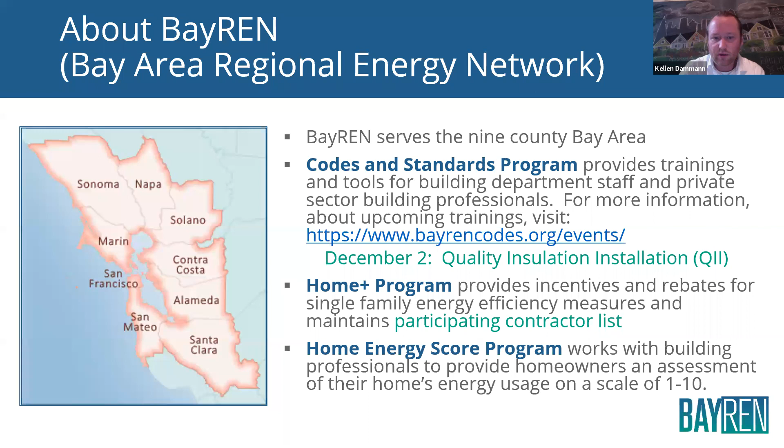Okay, so this is Home Plus. Like I said, it's a rebate program for homeowners. In order to offer rebates as a contractor, you need to sign up with the program, which involves sitting in on some webinars and filling out some paperwork. It's free for contractors to join, so you don't need to worry about paying any dues or anything like that.

And really, some of the other benefits include all the marketing that the counties are doing in the 9 Bay Area counties. So we're really trying to drive demand to BayREN contractors so they can do this work and offer rebates to their customers. There's another cool service called the Home Energy Advisors.

So people can call them up. They're part of the BayREN program, and they're just there to kind of answer all their questions about home energy improvements, how to navigate the rebate programs. So if you don't have time or you want someone that you're working with to get a second opinion or talk to someone who's kind of a third party energy expert, that's a good service as well.

And can we advance one more? There we go. And then Home Energy Score. I wanted to shout this out too, just because I know that some contractors use this kind of as a referral service. Basically what it is, you go into a home and do a home energy score, which is kind of taking the specs of a home. It should last about an hour or two, depending on the size.

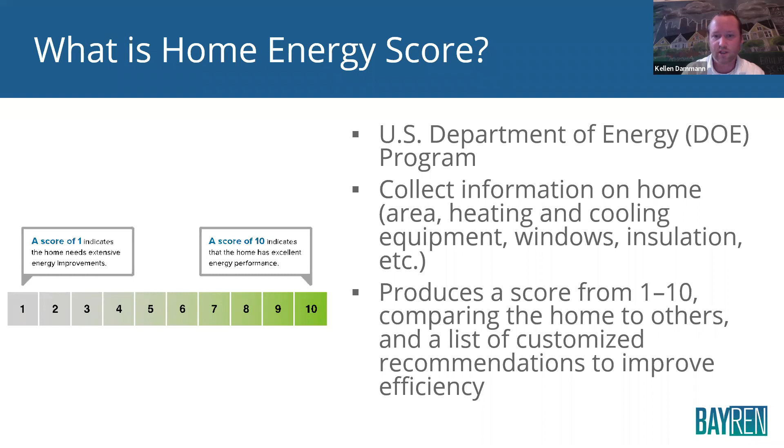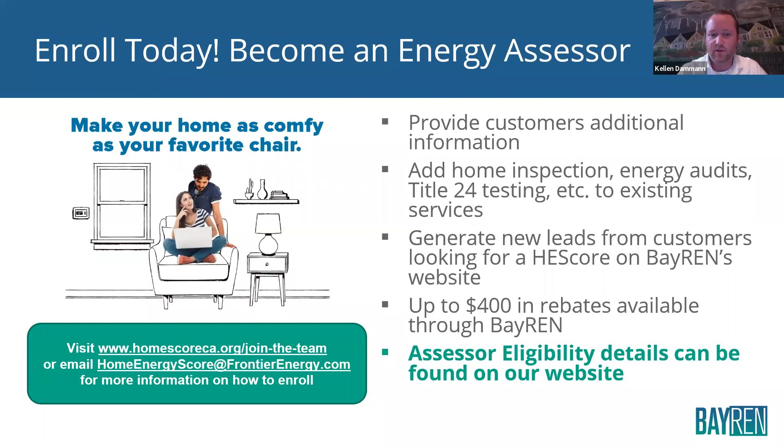And that's just more on Home Energy Score. Looks like it's up to $400 in rebates. But yeah, 200 for sure. I think there's a couple add-on programs to get it up to 400. And yeah, that's it for BayREN, I think. There we go. Great. Awesome. Thanks, Kellen. All right, so today's learning objectives as far as the heat pump water heater class goes.

So we're going to learn some step-by-step actions needed to replace a gas water heater with a heat pump water heater. We're going to kind of go through an example of the steps involved in that process. It's definitely different than just a like-for-like swap out of a water heater. We're going to be familiar with the benefits of electric heat pump water heaters.

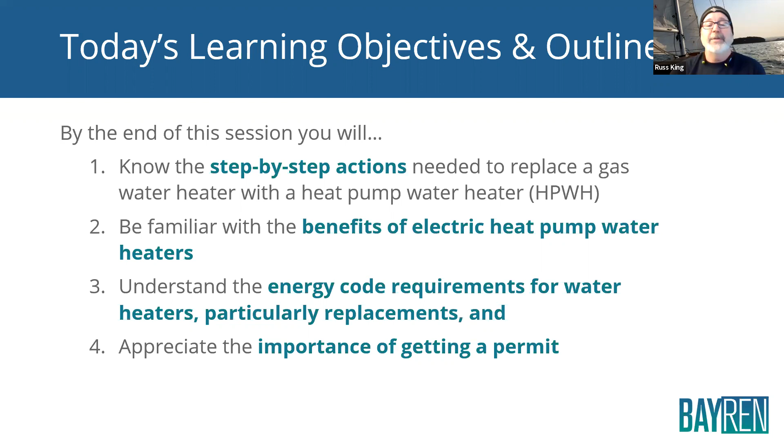We're going to understand the energy code requirements for water heaters in general, particularly replacements, because that's going to be the most common type of water heater project that you'll be dealing with, just replacing an existing water heater with a different type of water heater. And then we're going to learn to appreciate the importance of getting a permit for replacing water heaters.

Today's agenda: heat pump water heaters. I'm going to minimize that screen there. So we'll talk about some of the specifics related to heat pump water heaters. We'll talk about the 2019 Energy Code requirements. If you're not familiar with the California Energy Code, it changes every 3 years. It's called Title 24. It's actually Title 24 Part 6 is the correct term. We are in the current cycle, which is the 2019 Energy Code requirements. It took effect on January 1st of this year.

And then we're going to talk about some step-by-step installation details. We'll talk about best practices. We'll have a real quick quiz, and then we'll give you some more resources and have a Q&A session at the very end. We're scheduled to go until about 4:15, if I'm not mistaken. And this is the first time we've taught this particular version of the class. So I'm going to go a little quick just to make sure that we don't run out of time at the very end. And we'll stop and have a place for you to ask questions.

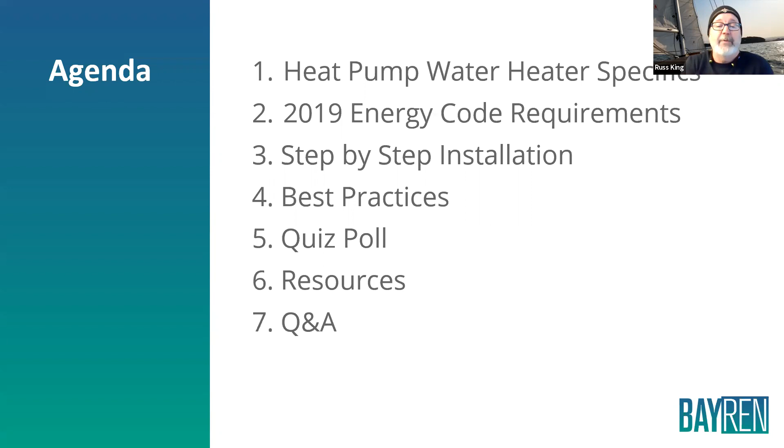All right, so you should have been mailed some handouts. If not, let us know. We can send you a link to those. Those include a heat pump water heater assessment sheet, a residential water heater alterations permit guide, and then a regional heat pump water heater incentive guide for contractors. Okay, so you should get all that information. And then you'll get copies of these slides after the training, okay?

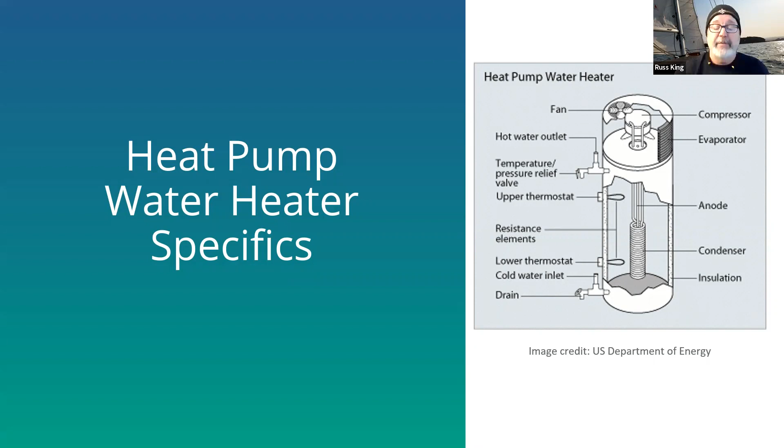All right, so let's talk about heat pump water heaters. As you probably know, they've been around for a long time. I didn't realize this. They've been around since the 70s. They just didn't get any traction for a variety of reasons, but they're definitely making a comeback right now for a lot of reasons. In the current market, basically all the major manufacturers do manufacture some sort of heat pump water heater. There are a few companies that kind of specialize in heat pump water heaters, like Sanden. Their heat pump water heaters are pretty unique, very efficient.

As far as the size goes, they're very similar to a regular storage water heater, 40 to 80 gallons. As far as electricity, they draw about 1,300 watts. Okay, when they're running, they use about the same electricity as a blow dryer. An electric resistance element, when that kicks on, will typically draw quite a bit more than that. So when they are running, they draw a lot less electricity in heat pump mode. Most of them have electric resistance backups, and when that kicks on, it'll pull 4,000 to 5,000 watts.

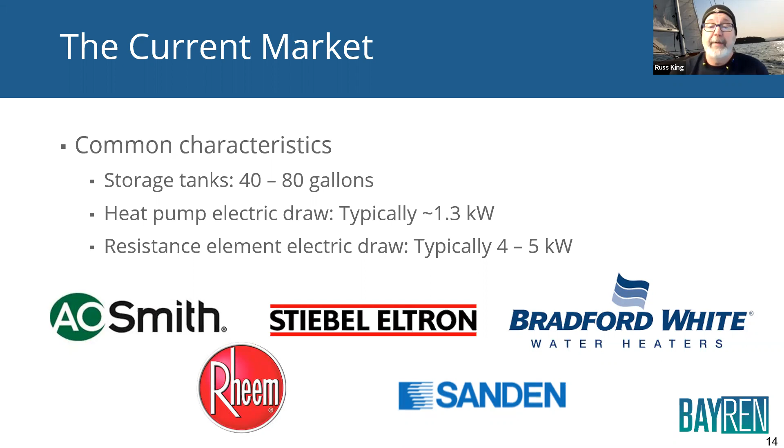Okay. There are two basic styles, if you will, of heat pump water heaters. There's the integrated, where the heat pump and the tank are all kind of one piece. And then there's the split system, where the storage tank sits in one location, and the condenser and the heat pump unit are separate and kind of sit outside or wherever you want them to go. We'll talk a little bit about where you can install these.

Where you can install heat pump water heaters is a consideration, because in order for them to work, they need a good flow of air. That's where they get their heat. They extract heat from the air. And so in order to do that, they need a good flow, a good supply of air to pass around them so that they can extract that heat.

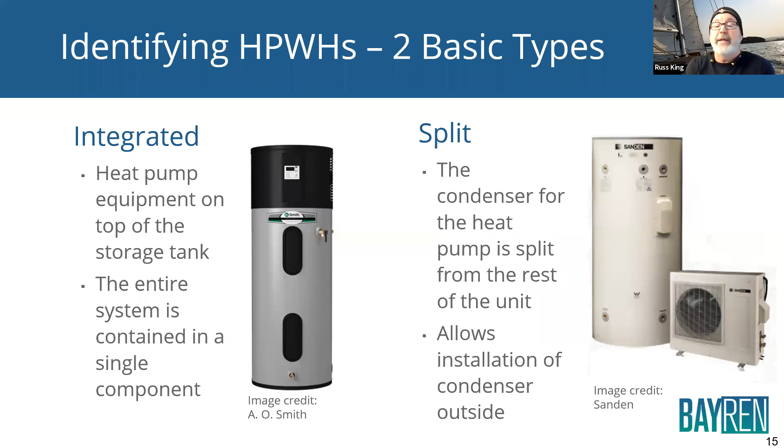So on an integrated heat pump water heater, just some features. There's going to be the heat pump unit that sits up on the top there. You can usually tell those by the little louvered vents that allow air to pass through. You'll see those on the right-hand side of this particular one. You see those louvers up there. There'll be some sort of control panel, a little digital control panel, as opposed to the older style water heaters, like a gas water heater that's just got a knob with a dial on it. These are pretty sophisticated. There's definitely a geek factor that goes along with heat pump water heaters.

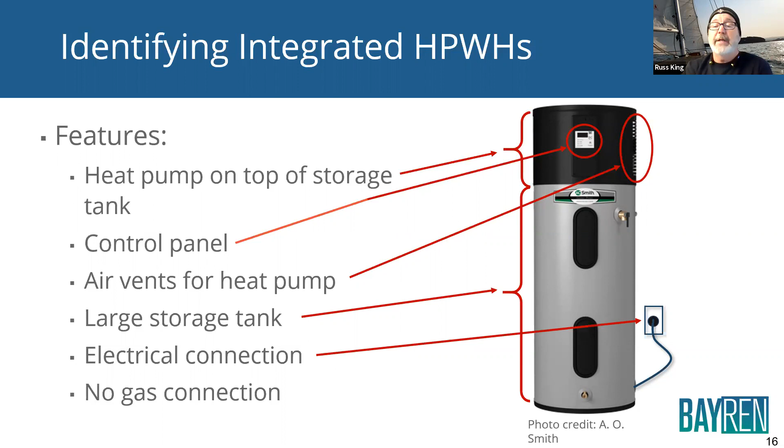As I mentioned, there'll be those little air vents on the side so that air can pass through. They don't always have to be on the side. They can be on the side and the top or some combination. But the point is air has to pass through there. That's where they're getting their heat; they're actually extracting heat from the air that circulates around it. There will be some sort of large storage tank. There will be an electrical connection and no gas connection, okay? So those are kind of the features of an integrated heat pump water heater.

Now, as far as the split system, the split heat pump water heaters, the heat pump is separate. It's a separate unit. If you're familiar with a ductless mini split, like a Fujitsu or a Mitsubishi mini split, it looks just like that. It's a little suitcase style condenser with a fan in it, and just like a mini split heat pump that does space heating, it's extracting heat from the air. Okay, now the nice thing about these is that you can basically put the tank anywhere you want to, but there will be a refrigerant line.

If you look up in the right hand corner here, you'll see the outdoor unit and the tank. There will be refrigerant lines, just like a mini split heat pump for space heating, connecting those two units. Okay. So no heat pump on the top. There is a condenser, a separate component, and then there will be refrigerant lines passing through from one to the other. Okay, so that's how you identify a split system.

These can sometimes be confused. There are certain types of solar water heating systems out there that have just a plain storage tank that looks kind of like this, but really the identifying feature on these is the refrigerant lines coming out of them. Okay, there will be insulated copper lines coming out of them.

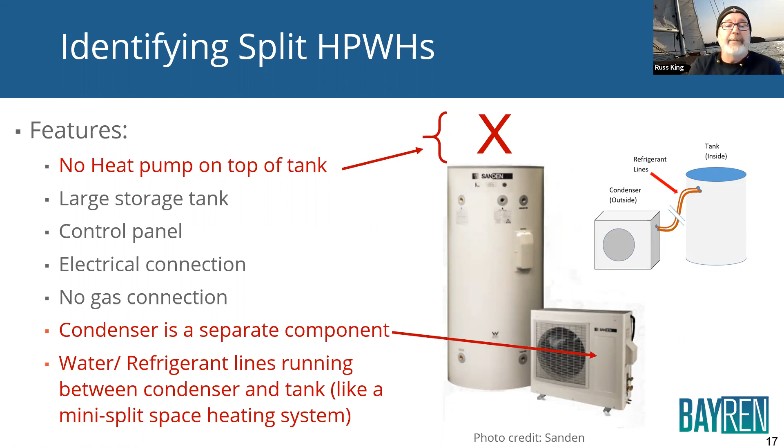Quick note regarding efficiency ratings. For many, many, many years, we used something called the energy factor, the EF. Well, the Department of Energy is switching over to a new type of rating called the UEF. And it's basically just a slightly different way of testing water heaters to get an efficiency. It's different than the energy factor.

A single water heater could have both a UEF and an EF. They will be different numbers. They believe that the UEF is a little bit more realistic and it does a better job modeling efficiency of a water heater when it's under actual real use. Okay. If all water heaters have UEFs, it allows you to compare similar water heaters to each other to say, oh, this one's that much more efficient than the other one.

It is replacing the old energy factor. They're trying to get rid of that. All water heaters manufactured after a certain date, which is June 2017, will have a UEF rating. Anything before that will have an energy factor.

Okay. There's no real one-to-one correlation between an energy factor and a UEF. Some are lower, some are higher. It just kind of depends on the features of the water heater and the type of the water heater. So it's not like you could just take the energy factor and multiply it times a factor to get the UEF. It's actually a different test methodology. And so it varies.

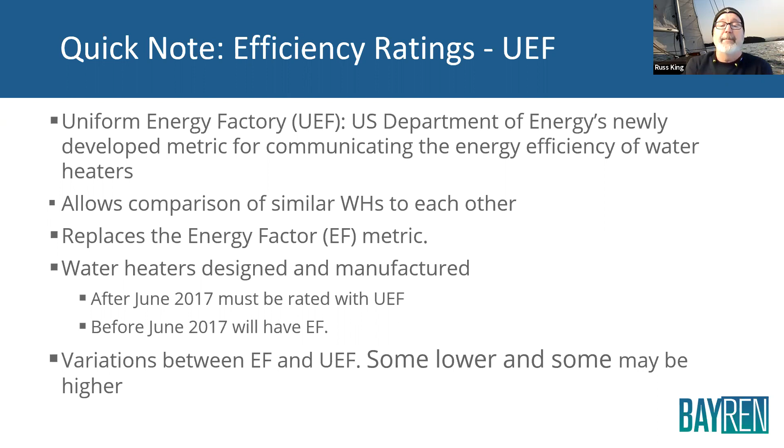NEEA is the Northwest Energy Efficiency Alliance. They are the people who have been delegated to develop water heater specifications for testing of heat pump water heaters. It's a collaboration of all the Pacific Northwest organizations and utilities and laboratories and stuff like that. And they fund energy research for developing new types of water heaters and advancing water heaters.

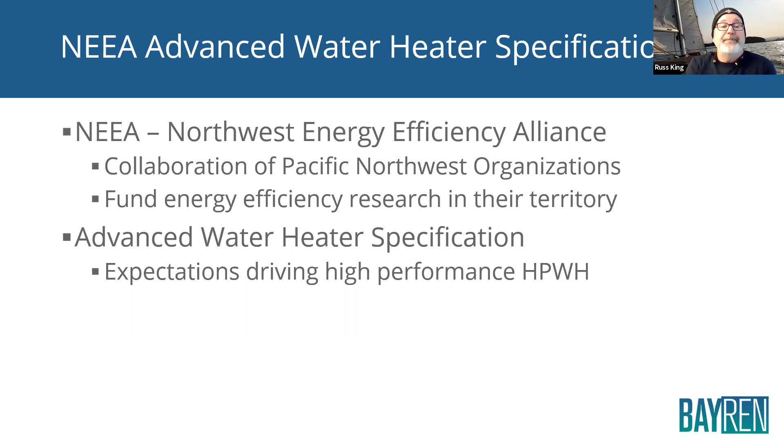But they're kind of like the AHRI. What AHRI is to air conditioners and furnaces, NEEA is to heat pump water heaters. Okay, they're the ones who test them. They develop the test protocols, and they're the ones who issue the efficiency ratings on various heat pump water heaters. So that's where you'll go to find something.

If you want to look up a heat pump water heater to find out what the efficiency is, you'll go to the NEEA qualified products list, and they have 3 basic tiers for the different levels of efficiency for heat pump water heaters. And it's not just efficiency. If you look down here, you'll see tier 1, tier 2, and tier 3. They do have certain efficiencies. So tier 1 is a 2, tier 2 is a 2.3, and tier 3 you have to be at least 2.6. But there's also other features that they have to have in order to hit those tiers as well.

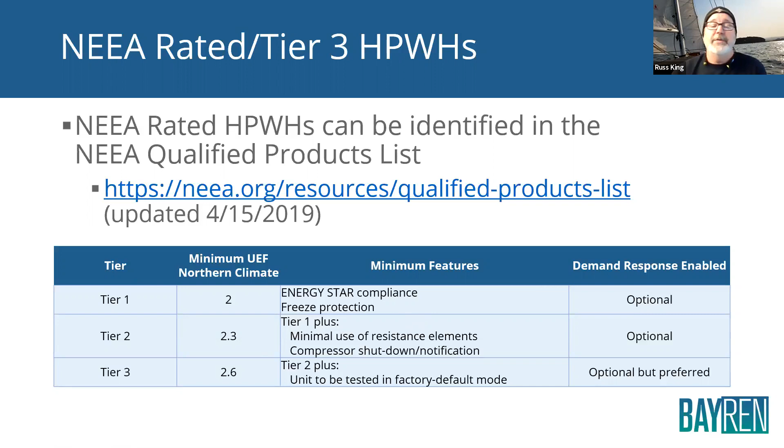Okay, and that'll come up in a little while because one of the requirements will say if you're going to replace this kind of water heater, you have to either do it with a tier 3 with all these features or a tier 1 and you don't have all those extra features. So that's why these tiers are important here.

So some of the advantages of heat pump water heaters: first of all, they're very efficient. If you compare them to other types of water heaters, using the new UEF, gas storage water heaters are in the 0.59 to 0.69 rating. That's an efficiency rating, so 59 to 69% efficient. Gas tankless water heaters, instantaneous water heaters, are 82 to 95% efficient.

Electric resistance water heaters are 99% efficient. That's very efficient, but the problem is they're using electricity, and electricity is very expensive when you look at it on a BTU per BTU basis. Then you get to heat pump storage water heaters, and you're getting efficiencies of 200 to 340%. How is that possible? How can you be more than 100% efficient? Well, heat pump water heaters cheat, if you will. They cheat a little bit.

They're not actually making their own BTUs. So whereas an electric resistance water heater takes electricity and converts that electricity into heat, heat pump water heaters steal BTUs from the air. So the electricity that they do use is not converting to heat. It's taking heat from the air by compressing and expanding refrigerant. So it's actually a much more efficient way to gather heat as opposed to creating heat from scratch.

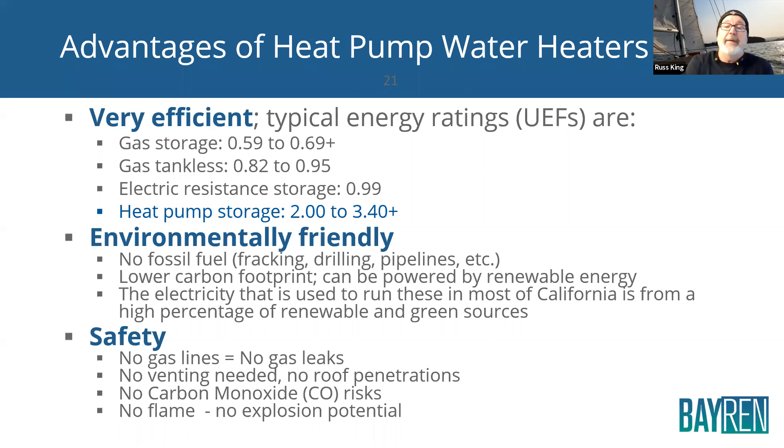There's no gas. There's no gas leaks for explosion. You don't have to worry about venting, so there's no penetration through the roof for leaks and things like that. No carbon monoxide. And then no flame, no explosion risk potential for storing gasoline next to it in your garage or things like that. Okay.

Some other advantages: they're Wi-Fi connected. If you've ever had the opportunity to play around with a Nest thermostat or anything like that, where you can call it up on your smartphone and change the temperature in your house. A lot of these heat pump water heaters are Wi-Fi connected, so you can actually call them up on an app on your phone and set the temperature. You can see how much it's been running and things like that. So very precise temperature control.

And by the way, the whole geek factor with the Bay Area, the very tech savvy region that we live in, this is actually a big selling point for people to be able to call up their water heater on their phone.

And then the other interesting thing is, with heat pump water heaters, a byproduct is cool air. Because they're extracting heat from the air around them, when you extract heat from something, you're essentially cooling it. So when you extract heat from air, the air gets cold. And so what comes in is warm air, what comes out the other side is cold air.

So if you can take advantage of that and use that cold air to maybe cool your garage on a hot day or a sunroom or something like that, by all means, take advantage of it. A lot of the Bay Area tends to be fairly cool, so maybe that's not the best thing, but certainly in the warmer climate zones, it's a good thing.

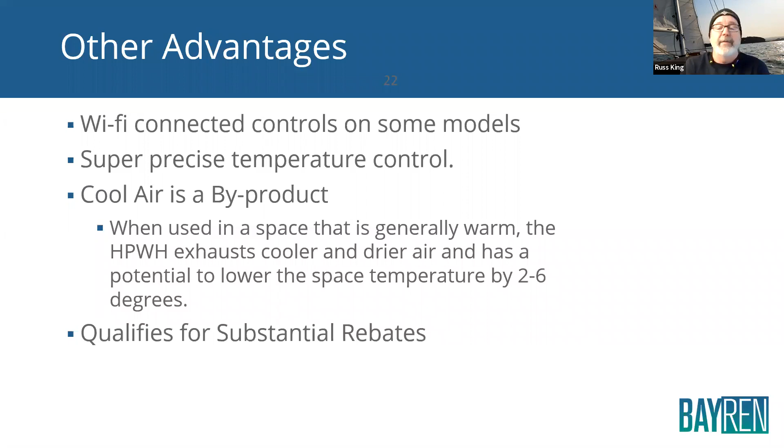And then, of course, heat pump water heater rebates. A lot of these BayREN programs and things like that are really, really encouraging people and basically, in some cases, buying the water heater for you to put in, okay? So that's great. Take advantage of those for sure.

So some of the installation requirements and considerations: most require 240 volt, 30 amp supply, okay? Some of the newer ones are getting down into 15 amp circuits, and then hopefully pretty soon, or supposedly coming soon, they're gonna start having some 115 volts, so we don't have to worry about taking up so much room on the electrical panel.

Heat pump water heaters require a certain volume of air that they can extract heat from, or ventilation where air is passing through. As far as volume, this is not a code requirement. This is mostly what manufacturers suggest, that about 750 to 1,000 cubic feet is what they need to work well.

And that's actually less volume than, say, a one-car garage. So if you have a one-car garage, this will work fine. The other thing is if you can provide vents to let air pass through. So you can put these in a small room or a closet as long as there's good ventilation of air, that air can pass through and sort of refresh itself. You don't want to put these in a very confined space, because the air will get colder and colder and colder, and pretty soon the air is really cold and the water heater is really struggling to extract heat from that air, okay?

You do need a condensate drain. And then the other thing is, typically replacing a gas storage water heater with a heat pump water heater, you will usually put in a slightly larger storage, okay? If you're replacing a 30-gallon gas storage water heater, you might want to go to a 50-gallon heat pump. If you're replacing a 50-gallon gas, you might want to go to an 80-gallon or something like that. And the reason is they don't heat the water quite as fast.

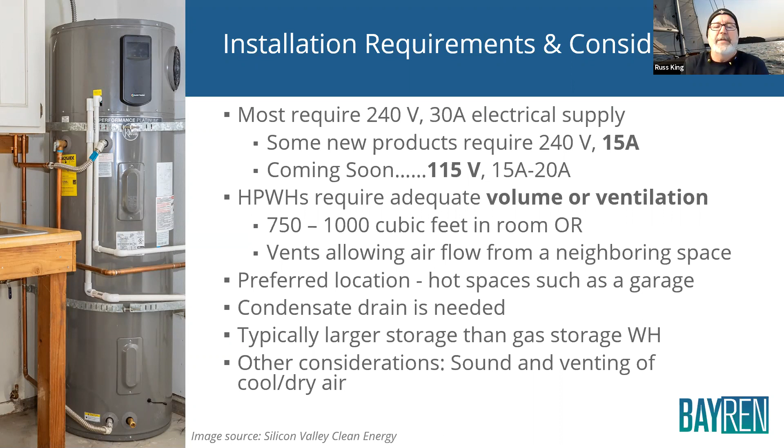Okay. All right. So let's talk about heat pump water heaters and the energy code. But before I do, are there any questions? Yeah, Russ, I was going to tell you we do have a question in the Q&A.

Okay. Let me see. How does this electrical equipment work during PSPS events? I presume you mean when they shut off power. Well, just like any other electrical equipment, they shut off the power, it shuts off. But the other nice thing is these work very well if you have like a house battery or a backup generator or anything like that. They will work like that. But yeah, like any other electrical, when they're shutting off the power for safety reasons or just general power outages, they do shut off. But they do typically have a much larger tank on them as well. So you'll have a much larger supply of water than you would if you had, say, a smaller electric resistance water heater or something like that.

As far as when and what companies will be offering the 115, I honestly don't know. I've just heard from several places that those are in the works. New companies are coming out almost weekly with new technology on this stuff. So I would just Google it and find out. Yep. All right. Did we get them all, Jeremy? It looks like there's one in the chat as well. Oh, in the chat. Let's see here.

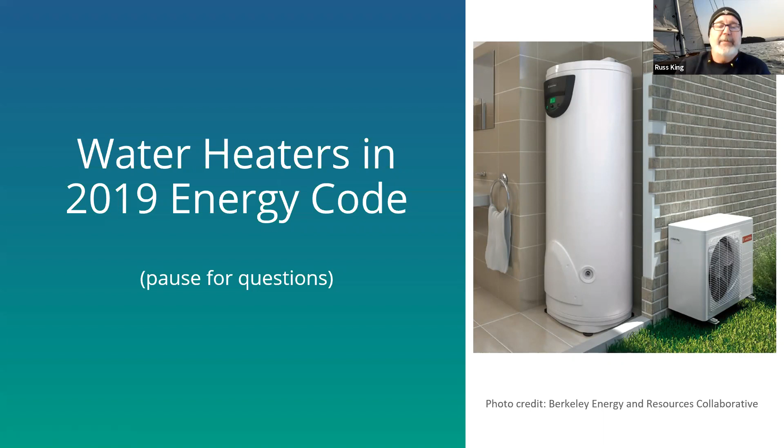Okay, let's press on. So energy code, 2019 energy code, as it relates to heat pump water heaters. The first thing you need to know about the energy code is that it breaks California up into 16 climate zones. And in the Bay Area, there are 5 of them, climate zones 1, 3, 2, and 4, and 12. 1 is the coolest one. You'll see that's up the northern coast there. Climate zone 3 is kind of the greater Bay Area, if you will. It's a very marine climate.

Climate zones 2 and 4 are sort of transitional. You definitely get some hot days in Santa Rosa. You get some hot days in San Jose and east of San Jose. And then climate zone 12 is actually where we are over in the Sacramento Valley. It's hot. It's cool winters and hot summers, okay? So you've got to know which climate zone you're in. It does vary, not so much for heat pump water heaters, but a lot of the other energy code aspects vary a lot by the climate zone that you're in.

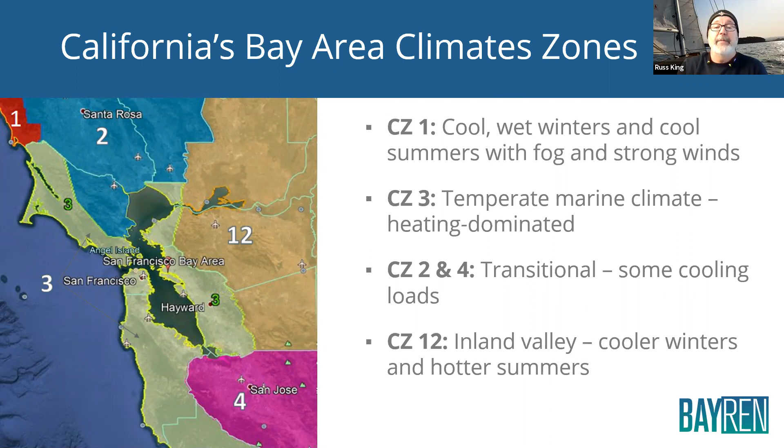Okay? Then as far as how the code applies to various things, the energy code sort of depends on the scope of project, okay? And when we're talking about projects that deal with residential water heaters, these are the basic types of projects that you're going to deal with. You're going to deal with a replacement. So that's an existing home that's got a water heater in it, and you're going to replace that old water heater with the new water heater. And when you do that, you can either do a like for like. So if you've got an electric resistance and you're replacing it with an electric resistance, you can do that. Or if you've got a gas storage and replacing it with a gas storage, you can do that.

The other thing you can do is you can replace a gas storage tank with a tankless water heater. That's one. And then you can switch fuels. You can go from gas to electric. So those are the basic types, and in the energy code, those are referred to as alterations, okay? And that's what we're going to focus on mostly today, because in terms of sheer volume, that's probably the most common type of water heater project. But there are some other ones too.

You can add a water heater to an existing home. So you've got one, and the people living in the house have decided that one is not adequate, and maybe they can't get heat way over on the far side of the house. So they're going to put a little tankless water heater over in the master suite or something like that. So that's adding a water heater. That's also called an alteration, but instead of replacing a water heater, you're increasing the number of water heaters. Let me put it that way.

The other thing that can happen is you're adding onto the house. You're adding a wing onto the house, or you're conditioning the garage or something like that. That could also involve adding a water heater. Whenever you make the house bigger, that's called an addition, and that has certain code requirements that go along with it. And then, of course, last but not least, new construction. You're building a brand new house from the ground up. It's going to have a water heater or 2 or 3 or 4 in it. And that's called new construction. That has its own set of rules that apply to water heaters. Okay. So knowing those different kinds of projects, that's how we're going to organize our discussion about the energy code. And then, of course, we're going to focus mostly on water heater replacements.

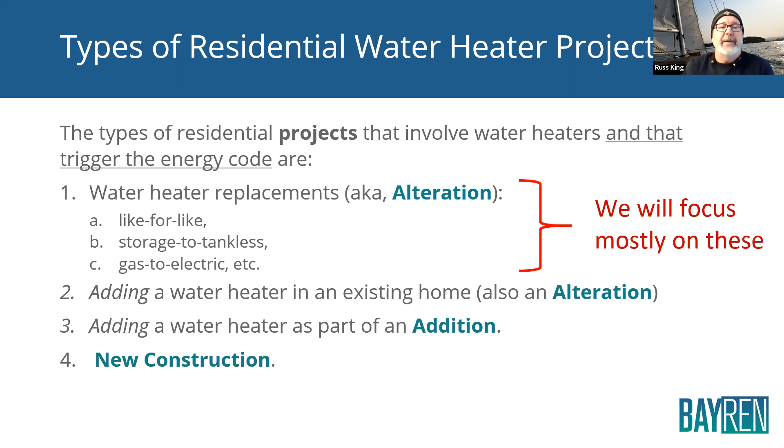Okay. The other thing to know about the energy code is there are different compliance paths or compliance options. Depending on the complexity of the project, if it's a really simple project, just a replacement or an alteration or maybe a small addition, you can do what's called the prescriptive approach. And it's basically just a list of things. Follow this list and you will comply. Okay. There's no design flexibility. It's very common for alterations, change outs, and smaller additions.

The other option that gets much more complicated really quickly is called the performance path. And that's where you actually model the house. You use computer software and you model the house. This is very common for new construction. The vast majority of new construction projects use the performance path.

You hire an energy consultant, they create this model, they model the house, you start putting all these energy features in there, and the software basically tells you whether it passes or not. The nice thing about that is you can trade things off. So in the prescriptive path, you follow the list. In the performance path, you do a computer simulation.

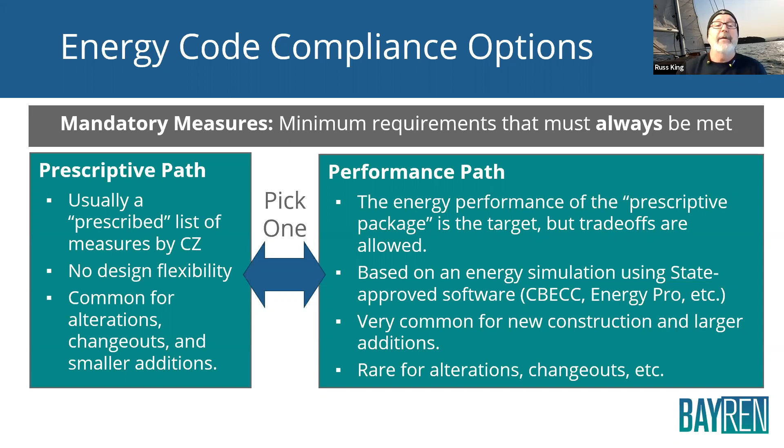Permitting issues. So building permits are required for any water heater that is installed, removed, or replaced. That's pretty much standard throughout the building code, the plumbing code, and things like that. You need to get a permit. They're required to get a rebate. Okay, that's important. And when you apply for your permit, if you're not real familiar with the energy code, you're going to want to get familiar with these terms.

There's the CF1R Certificate of Compliance and the CF2R Certificate of Installation. There's a third one called the CF3R, but that's mostly for HVAC kind of stuff. There is no CF3R for water heaters. The CF3R is a third-party inspection, okay? So CF1R is Certificate of Compliance. That's what you're supposed to do. The CF2R is a Certificate of Installation. That's what you did. That's to document that you met the requirements of the CF1R.

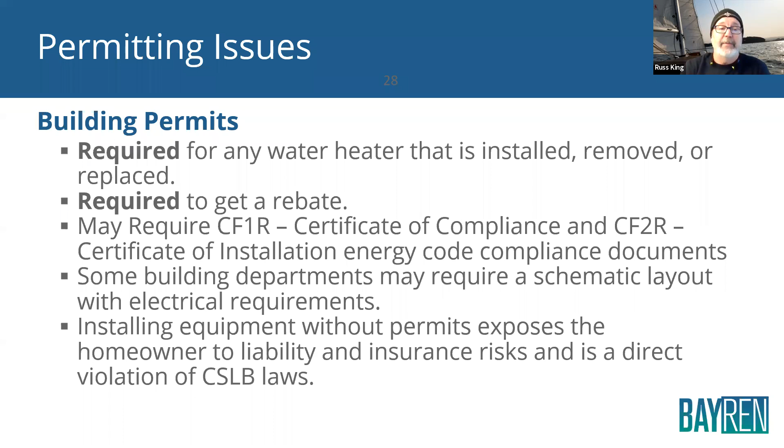Some building departments may require, in addition to those forms, a schematic layout of the electrical requirements if you're adding a bunch of circuits and things like that. If you're replacing a gas water heater with an electric heat pump water heater, you're gonna have to run some new lines. They may require sort of a plan or at least a schematic showing what you're gonna do with that. Installing equipment without permit exposes the homeowner to liability and insurance risk and is a direct violation of CSLB laws, okay?

So alterations projects, mandatory measures. So we talked about the different types of projects, alterations, additions, new construction, and then we talked about prescriptive, performance, and mandatory measures. So now we're going to focus on alteration projects and mandatory measures that apply to those alteration projects. So this would be a change out. This would be replacing an existing water heater with a new water heater, okay?

So here's the code section 150.2(b)1H. Memorize that. No, I'm kidding. You don't have to memorize it, but you do need to know that pipe insulation, insulating the pipes around a water heater, is a very important energy feature. A lot of energy is lost through the pipes.

Okay, so if you're replacing a water heater, what it says is all newly installed piping, the insulation requirements of section 150.0(j)2 must be met. So any newly installed piping must be insulated. We'll talk about what those requirements are in just a second. And then it says any existing accessible piping must also be insulated to a certain level.

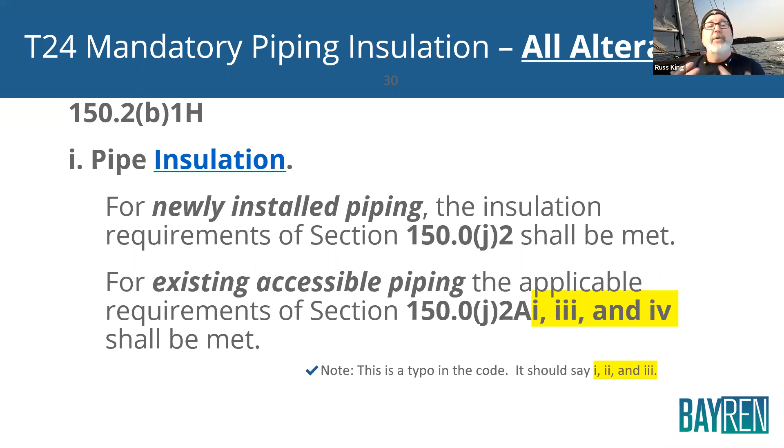Okay. Now this is kind of interesting. In the energy code, in this section, it says 1, 3, and 4. That's actually a typo. When they changed the code, they forgot to change these little numbers. It should say 1, 2, and 3. So just be aware of that. So the requirements are, and remember, this is all new pipes being installed. So if you're running a new pipe because you've moved the water heater or whatever, or any accessible existing pipes have to be insulated.

The first 5 feet of cold water pipes from the storage tank. So the cold water pipe coming off the storage tank, the first 5 feet of that has to be insulated. All hot water piping with a nominal diameter equal to or greater than 3/4 of an inch and less than 1 inch. Okay. So all the bigger pipes, accessible pipes, have to be insulated.

All hot water piping with a nominal diameter less than 3/4 of an inch that is part of a recirculating system. So it's got a pump on it that goes in a loop and comes back to the water heater. That has to be insulated. From the heating source, from the water heater to the kitchen fixtures, any accessible pipe has to be insulated. That's a mandatory measure. Okay.

From the heating source to a storage tank or between storage tanks. So I mentioned sometimes there's a storage tank, like from a solar water heating system. It's sitting next to the regular water heater. Any pipes that go between those have to be insulated. And then any buried pipe below grade.

Now, if it's an existing house and it already has buried pipe, that is not accessible, so you don't have to insulate that. It's only accessible piping. Now, the definition of accessible is kind of up to the local building department, but it's basically if you can get to it without too much trouble. If it's up in an attic, if it's in an accessible crawl space, and it's right there where you can put pipe insulation on it, that's usually considered accessible.

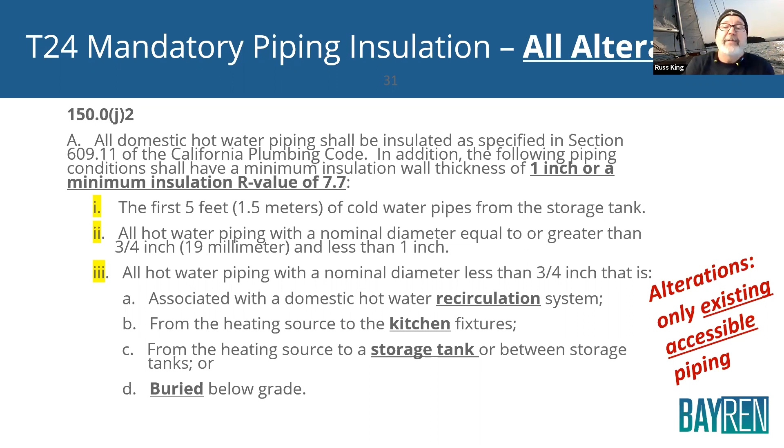If it's buried, if it's inside a wall that's sheetrocked, you don't have to rip the sheetrock off. That is not considered accessible. Okay, so there you go. All accessible pipes must be insulated that meet these requirements here.

As far as the actual insulation goes, once you determine that the pipe needs insulation, this is how you insulate it, and this comes out of the plumbing code. The insulation shall fit tightly to the pipe, shall fully cover all elbows and tees. Corners, elbows must be mitered, tees must be notched. All pipe insulation seams must be sealed. That's usually a caulk or a glue or a tape.

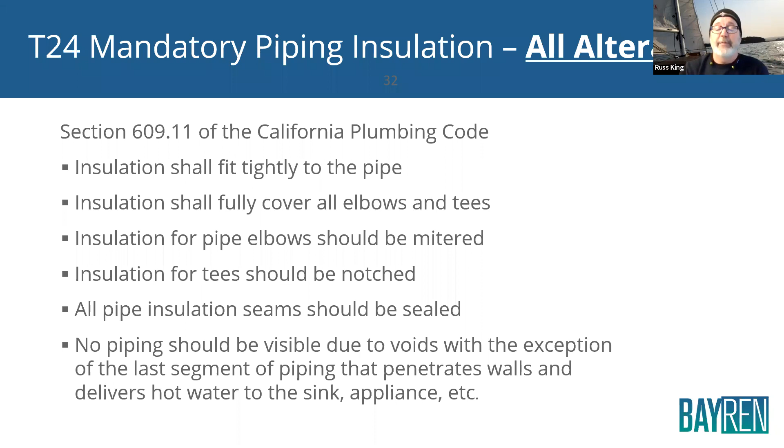No piping should be visible due to voids, with the exception of the last segment of piping that penetrates the walls or right at the sink or whatever. You can have that last little bit be exposed, but pretty much everything else needs to be covered. Installed piping may not be located in supply or return air plenums. Hot and cold water piping installed in parallel runs should be at least 2 inches apart from each other. You don't want hot and cold pipes touching each other because they will transfer heat.

That's not good. If a firewall interrupts the first 5 feet, then the insulation can stop on one side and then continue on the other of a firewall, like in an apartment or something like that. Pipe completely surrounded by wall, floor, or ceiling insulation does not require additional insulation. So if you've got pipes running through the attic and they're buried under blown-in insulation, or maybe you have fiberglass batts tucked around them, you don't have to insulate those. That is insulation on those pipes. Okay.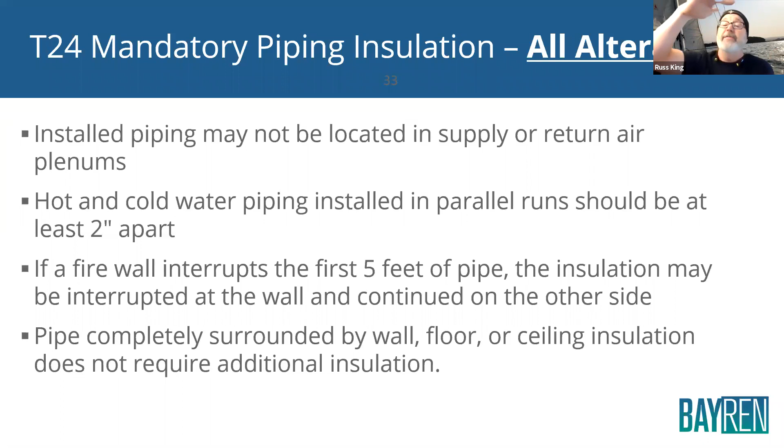All right. So that was mandatory measures. Now let's talk about alterations projects, prescriptive measures. And prescriptive measures are like a checklist, and there's some options. You can pick from this list or pick from this list. You usually have a little bit of options. They're not always mandatory, but here's an example.

So if no natural gas is connected to the existing water heater location, so you've got an existing house, and it's got an electric water heater in it, then if you want to replace that water heater, any electric water heater, including heat pump water heater, is allowed to be replaced there, okay? And this is interesting because in the previous code, it didn't say natural gas connected to the existing water heater. It said natural gas connected to the house.

And so that actually caused a lot of problems, because you can have a house that had an electric water heater over here and the gas comes over to the other side of the house where the furnace is. If that was being considered connected to the house... well, they cleaned up that language and made it a lot more reasonable, that says that that gas has to be connected to the water heater, okay? And this is if no gas is connected to the water heater. If there's no gas connected to the water heater, any electric water heater will do, okay?

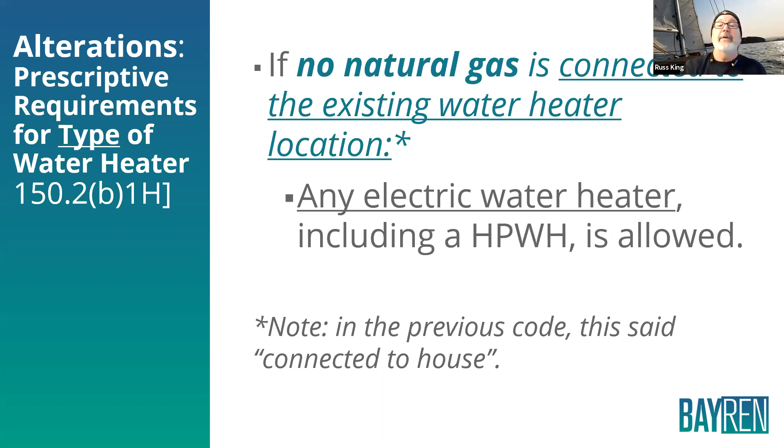Now, if there is gas and it is connected to the existing water heater and the new water heater is going into that location and you can connect to it, then the prescriptive measures have some choices, okay? There's some things you have to take into consideration. And there's two basic options. If you want to replace with a heat pump water heater, there are two basic options.

Option one is install a base efficiency. In other words, the cheapest heat pump water heater you can legally buy, tier 1, tier 2, okay? You can do that, but they're not as efficient. So you're gonna have to do a few extra little things to sort of bring them up to the cost effectiveness of a gas water heater.

So a base efficiency heat pump water heater has to be sitting on a special insulated pad. Okay, it's an R10 pad. I personally have not seen one of these, but apparently they're out there, and it prevents heat from conducting down the water heater. If the water heater that you're replacing was sitting on a box and you're replacing it up on top of that box, that's fine.

They just don't want it to sit right on the concrete. All right, then the other requirement for the base efficiency is a special communication interface that allows utility control for grid integration. One of the other really interesting things about heat pump water heaters is if the homeowner voluntarily allows them to be controlled by the utility, okay, the utility can use them like a battery.

And when there's excess power generation during the day, they can send that to these water heaters and actually change the set temperature in these water heaters as a place to sort of equalize the grid. And that's very interesting. So the water heater has to have the ability to do that. It doesn't have to be hooked up to the utility. It just has to have the ability to do that. Okay, so that's option one, base efficiency with an insulated pad and the ability to hook up to grid integration.

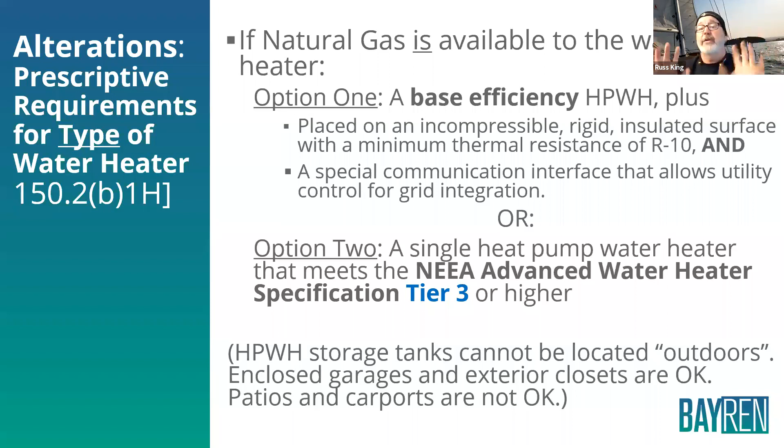You're not supposed to put them there, but you certainly can put them in an enclosed garage or an exterior access closet or something like that, assuming it has that circulation that it needs, okay? Let's talk real quick about new construction and addition projects, the mandatory measures.

Before we do that, any questions we need to answer before we move on? Jeremy, do we have any? Looks like right now there's none. Awesome. Okay. A bunch more people showed up too. That's great. Good turnout today. Thank you, everybody. All right.

So new construction and additions. So we're building a new house or we're adding on to one. These are the mandatory measures. And as you'll see real quick, they're basically the same as what we talked about before. All the pipe insulation stuff that we talked about. But here's the deal. In new construction, all pipes are considered accessible because they were installed newly. So you can't say, oh, I already buried this pipe underground, it's not accessible. Nope, at one point it was accessible. So you do have to insulate buried pipes in new construction.

All those other things we talked about between the water heater and the kitchen, pipes greater than 3/4 of an inch. What was the other one? Buried pipes, and then pipes in a recirc system. Those all have to be insulated in new construction. They are considered accessible and have to be insulated in new construction. And then additions, it just kind of depends. What are you running out to that addition? Does that addition have a kitchen in it? Does it have a water heater in it? Does it have a sink or anything like that? So that would just kind of depend.

Looks like we got a question pop up here real quick. Let me get that one. Nope, just a chat. All righty. Did I go too far?

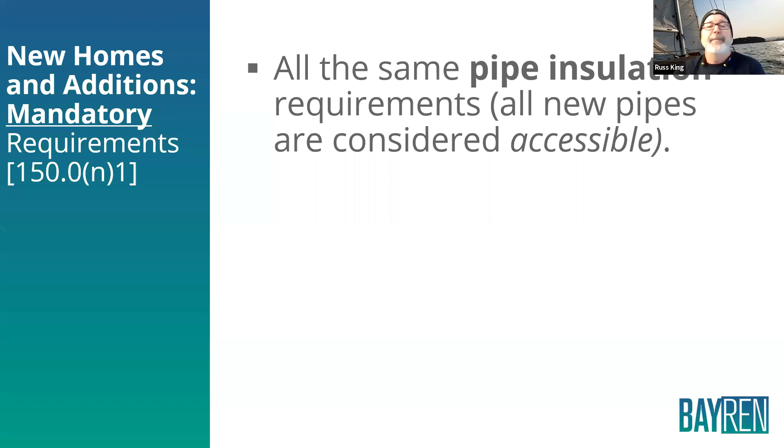Construction, pipes. Okay, here we go. In new homes or additions with gas or propane. Now this is kind of interesting. In new homes and additions where you're adding a gas or propane water heater, you must provide adequate electric capacity for future heat pump water heaters.

Okay, you have to basically stub out, because the best time to plan for the future is when you're building something new. And you say, okay, I want a gas water heater now, but I may eventually put solar panels on my roof and I may eventually want to switch over to a heat pump water heater. So the most cost-effective time to do that is when you're building that house or adding on to it.

So if you're building a house or adding on to one, and that includes adding a gas or propane water heater, you must basically make it easy to add a heat pump water heater in the future. That includes a dedicated electrical circuit. And I won't go into all the details, but you can read this later. But you have to have a certain size copper branch circuit, certain gauge, must come within 3 feet of the water heater, stuff like that. Both ends labeled as spare, and a reserved single pole circuit, future 240 volt use, has to be labeled.

And then there's also, the Energy Code has had this for a long time in new construction. If you install a gas storage water heater, they also want you to have the ability to upgrade to a tankless water heater. So they want you to oversize the gas for a storage water heater to upgrade to a tankless water heater. And then you also have to have the ability to upgrade to a heat pump water heater.

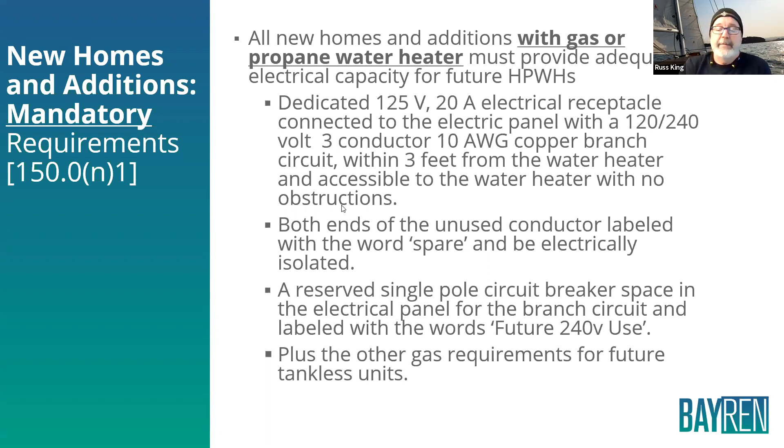New construction and addition project prescriptive measures. So what we just talked about was mandatory measures. Now we're talking about prescriptive. This is where you kind of have a choice. There's 2 options if you want to install a heat pump water heater in an addition without having to run the computer simulation. You can either do a base efficiency heat pump water heater and put in what's called a compact water distribution, a specially designed water distribution system where all the runs are very short, and then put in a drain water heat recovery system, or put a little extra solar on your house. So that's option 1.

And then option 2 is to put in the tier 3. And then in climate zone 1 and 16, 16 is up in the mountains like Tahoe, put in a little extra PV, or do the compact water distribution system. So depending on the efficiency of the water heater, whether it's high efficiency or base efficiency, it just has a little extra features. And here's where the climate zones come into play as well. Okay, so new homes and additions.

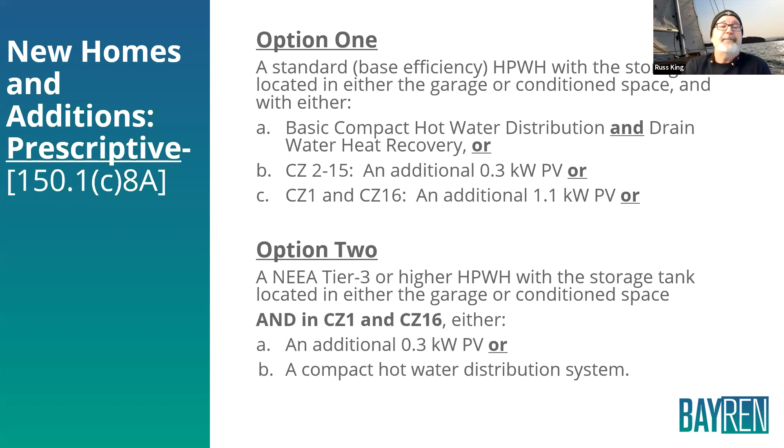Heat pump water heaters can also be modeled. In the performance approach, absolutely, you can model the heat pump water heater and get good credit for that. Basically, in the performance approach, you're using certain energy features to trade off other energy features. So if you have a really high efficiency water heater, you can trade that off against maybe a little less ceiling insulation or a less efficient air conditioner. So absolutely, heat pump water heaters are modeled very well in the performance approach. Okay.

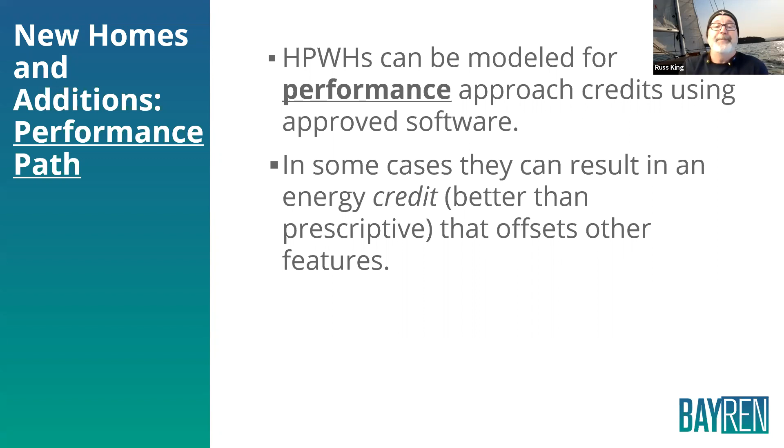Recirculating system. You might occasionally get a homeowner asking you to add a recirculating system. Those were popular in older homes where water has a long ways to go to get to the fittings in the house, so they'll add a little pump and pipe in a loop, and this pump sends hot water through the loop so each fitting just taps off that loop, and they don't have to wait as long. Well, guess what? Those waste a ton of energy. You're basically heating the pipes in your house. It's like a radiant floor heater, just so you can have hot water coming to your various fixtures.

There are some, however, that don't use as much electricity, and those are called demand recirc systems. That's where instead of the pump running all the time or on a timer or temperature control, you go into the bathroom, push a button while you do your business, and then the pump turns on, and when you're ready to use hot water, it's there.

Okay, so those are called demand recirc systems. Those are actually kind of encouraged by the energy code, because not only do they save energy, they save water. So instead of standing there and holding your hand and waiting for hot water to come out and wasting all this water, as soon as you turn on, the water's there, but you're not circulating this water through the house all the time. Okay, so if you want to add to an existing home a recirc system, it can only be the demand recirc type.

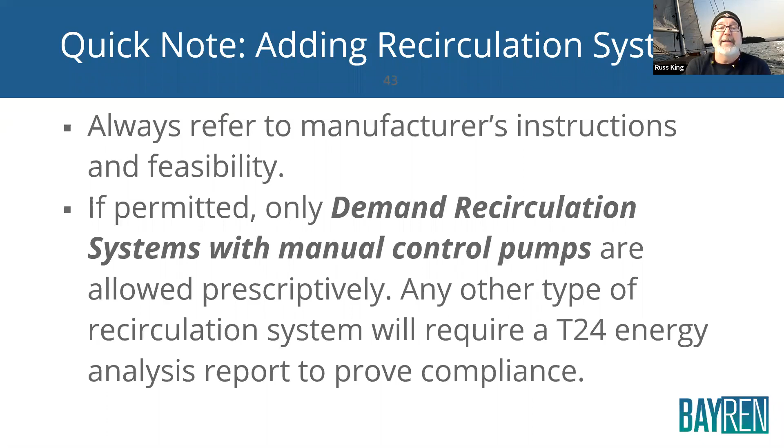And by the way, I won't go into a whole bunch of detail here, but demand basically means that it has a button that the occupant turns on and starts the pump. There would be manual controls. They can be located in kitchens and bathrooms. They can be activated by wireless switches if necessary, so they're easy to install.

Controls will allow the pump to operate until hot water reaches that point, okay? And it doesn't run for a whole long time. So there's some requirements for the controls of when the pump turns on and when it turns off. The controls shall limit pump operation to a maximum of 5 minutes after activation. Okay, so like I said, those are actually quite efficient, and they do save a lot of water as opposed to just standing there waiting for hot water to get there.

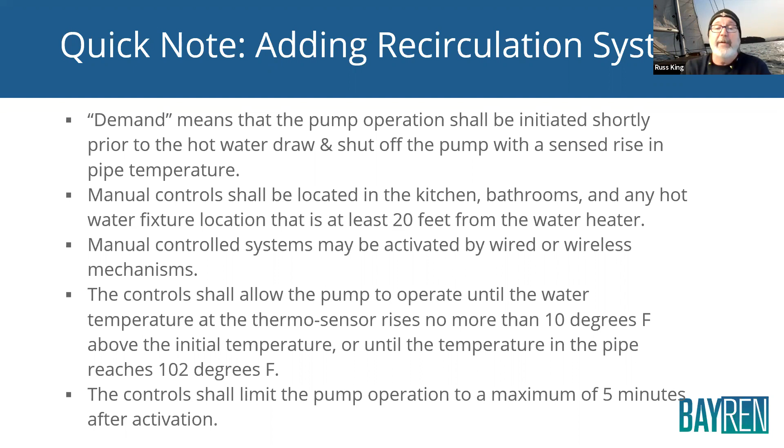All right, so just some examples now of heat pump water heaters. This particular one is a GE heat pump water heater. So it requires 10 gauge wire. It requires 16-inch space above the unit. Again, this is just an example. You've got to look at the manufacturer specs for whichever one you want to install, but these are the types of things you're gonna have to take into consideration.

So 16 inches of space above the unit to get to the filter, 7 inches from the back wall. Make sure it's in a dry and heated location. That gives some examples there for the size of the room, or a closet that has a good louvered air supply. Temperature pressure overflow termination. It requires a condensate line. That's potentially a big deal, and a floor drain for the condensate line, if necessary. Okay, so obviously the electrical can be a big issue. We'll talk a little bit about that.

When the heat pump water heater gets installed, the CF1R certificate of installation, remember that base efficiency with all these features, or the tier 3, that all goes on to that CF1R certificate. So at the beginning, when you get your permit, you're telling them how you're going to comply, okay? And you're going to say on there, this is the type of water heater I'm going to install. When you do install the water heater, make sure you follow that CF1R. Make sure you meet all the prescriptive requirements. Make sure you meet all the insulation requirements. Make sure you take into account the condensate removal.

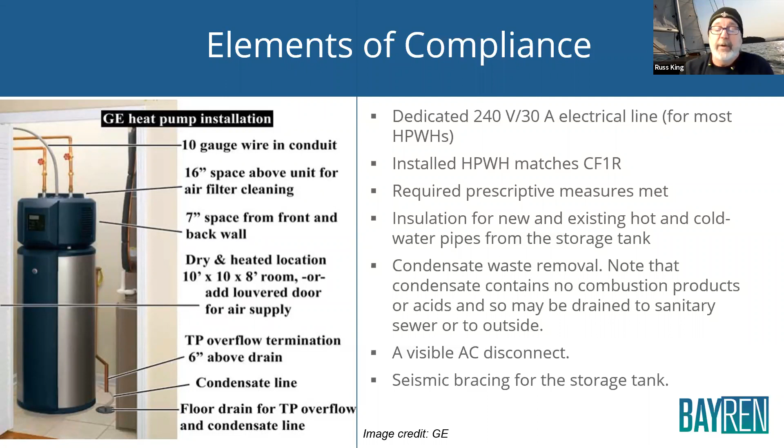You do have to have a visible AC disconnect for service, okay, so that anyone servicing this heat pump water heater can shut it off and they can see it. Make sure no one goes over and turns it on while they're working on the water heater and stuff like that. And then these are storage. These are very heavy. They have a lot of water in them, so they do require seismic bracing, just like any other storage water heater, okay? All right.

I mentioned already, if natural gas is connected, it has to be a tier 3 or meet these other requirements. If no natural gas is connected, then basically any heat pump water heater that meets the federal minimum can be installed. Okay, so the efficiency of the heat pump water heater that you're allowed to install depends on whether or not the house has gas to the water heater location.

They're just kind of assuming, well, there's gas here, it would be cheap to hook up a gas water heater, therefore the installed heat pump water heater has to be a little bit more efficient. If they were just going to replace an electric water heater, go for it. Put in a heat pump water heater. Any federal minimum heat pump water heater will do.

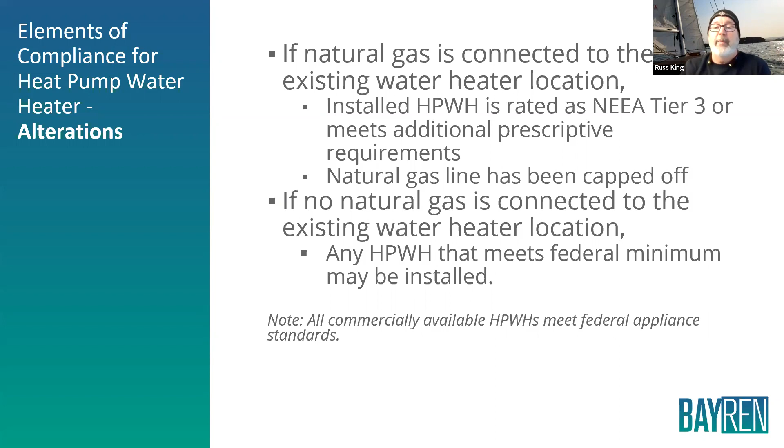All right, let's go through real quick. I am getting a little behind on time. If there's any questions at this point, Jeremy, do you have anything? Nope, nothing right now. Awesome.

Okay, so we're gonna do a real quick step-by-step installation, just sort of mentally walk you through the process of the kind of things you have to think about. This is just an example, okay? This is not intended to be, this is how you have to do it. This is just an example to, like I said, walk you mentally through the process of what you have to go through when you replace a gas water heater with a heat pump water heater.

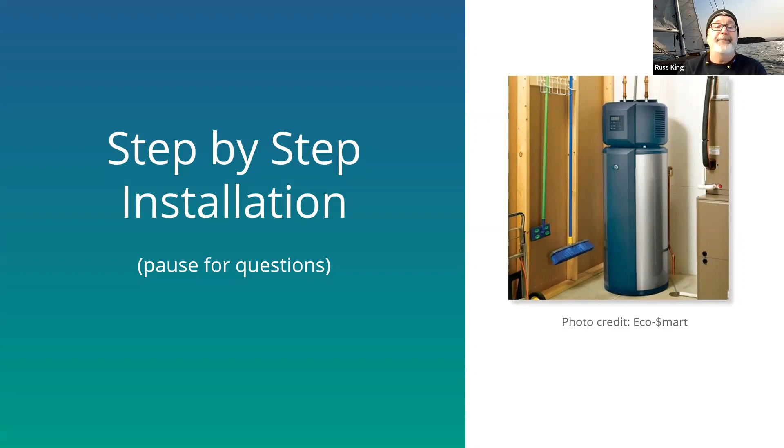So converting a gas water heater to a heat pump requires advanced planning and coordination between trades. We already talked about a great question about the water heater itself. Do you need special requirements to service it or install it? I think just to install it, it's pretty much just an enclosed unit. You don't have to hook up any refrigerant lines or anything like that. But if it's a split system, you have to set the outdoor unit and the tank on the inside. You have to charge the system with refrigerant. So that's a certain trade that has to do that.

And then of course electrical. A lot of water heater replacement companies also do electrical work because they deal with electric water heaters anyways. But if not, you're gonna have to partner up with an electrical contractor to do some of the work as well. So coordination between trades. The following steps will be required by manufacturer's instructions and/or local codes. Local codes always supersede any manufacturer's suggestions or recommendations, and definitely supersede these suggestions that we're about to give you.

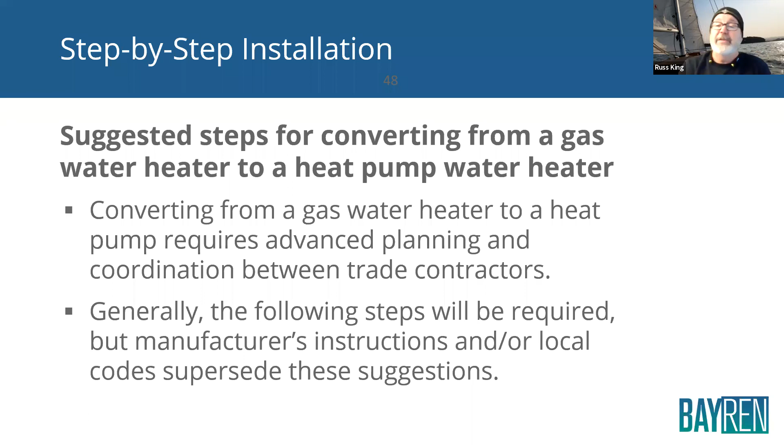So step one, find a good location. Heat pump water heaters do make a little bit of noise, and they need about 1,000 cubic feet, some of them down to 750. Basically a little smaller than a single car garage will work just fine. They should be placed in a garage, a basement, or other enclosed patio, so that they operate efficiently. They may not operate as well or pass code if placed inside a closet.

So be sure to check with the manufacturers. Each manufacturer will have very detailed specs on where you can put these things and what kind of air circulation you need around them. By the way, I forgot to mention some of them are actually ducted. They'll actually pull air from a different part of the house, use that air and dump it somewhere else. So that's another thing to consider when you're shopping for a water heater.

Looks like we got a question here. How is EQ bracing being performed with the 7-inch clearance on the back and blocking? I would just check with the manufacturer. That 7-inch clearance on the back was just that particular manufacturer's suggestion, but you can put blocks back behind it, 2x8 blocks. I've seen things like that. So yeah, check with the manufacturer, check with your local code on how to do that.

Let's see, where am I here?

Special equipment can be installed to offset the situation, which is kind of what I was talking about. You can put in louvered vents and things like that. So the manufacturers will give you good instructions on that. And then of course, condensate line. Make sure you can figure out a way to get that condensate line outside. It is pure water. You can dump it into a drain. You don't have to worry about it being acidic or basic like furnaces are.

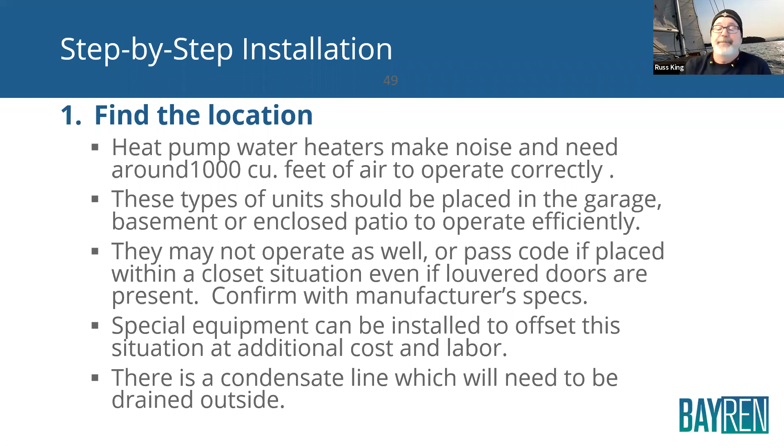Confirm space on the electrical panel. Okay, again, look at the actual unit that you're looking at. This is just an example, 220 volt, 30 amp breaker. There might be some new ones that require less. Be sure to check for those, but you got to check the electrical panel to make sure you got room.

Confirm the physical space exists. If space is limited, you can go to the skinny breakers. And in some extreme situations, you might have to go to a larger panel. That's where the cost can really go up. So be sure to check on that, and be sure to make sure you have qualifications to replace the panel if that's necessary.

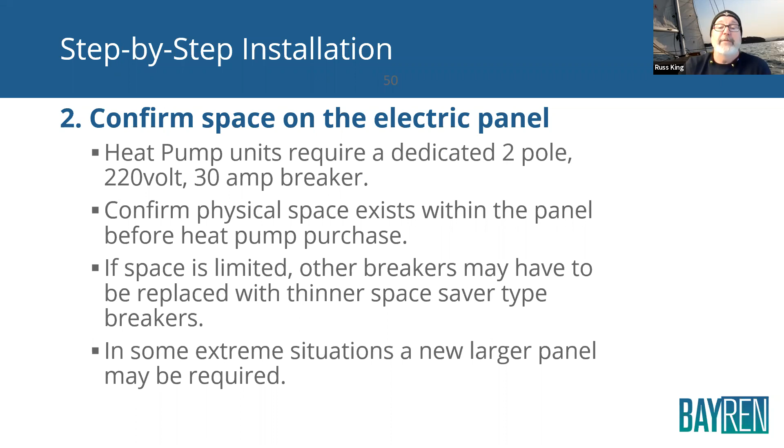And then shop around. Look at all these different manufacturers. You might work with a specific manufacturer or have a supplier that uses a certain manufacturer. Check with them, shop around, look at all the different features. Look at all the Wi-Fi interconnect features and things like that. Look at the requirements: are they ducted? Are they split? Are they integrated and things like that? Because you're gonna have a lot of different situations where one might work and one may not.

Consider models with connected functionality. That's the Wi-Fi stuff that allows mobile control, okay? And then especially if the house has solar panels, solar electric panels, PV panels, that's a great opportunity to take advantage of that. They can kind of do the timing of when their panels are producing the optimal amount of solar, and they can adjust the settings on the water heater to account for that. It's very cool.

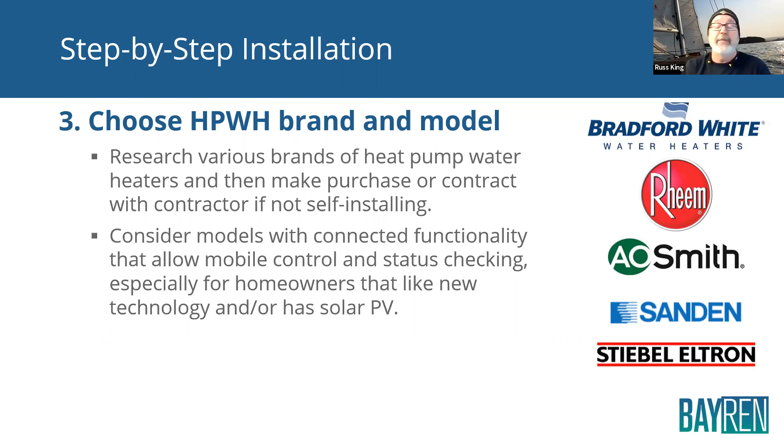Then get your building permit. Many building departments allow the permit to be obtained online or in person. Provide proof of the UEF. Don't always rely on manufacturers' marketing literature for the energy factor. The best way to do it is actually go to that NEEA website, look up the model number and print out that page from the NEEA website.

Okay. You'll probably also need a separate permit for electrical and plumbing work. If you do not do electrical work, have one or more electricians lined up that you can refer the homeowner to, or partner up with one and do the project together.

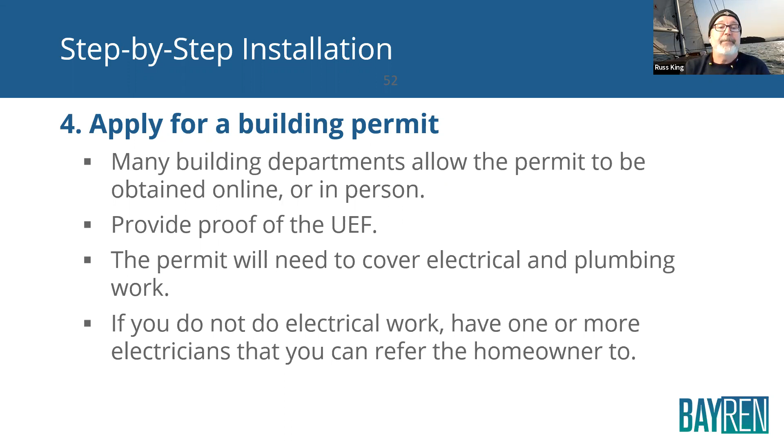Step 5, install the electrical system as needed. Obviously follow the NEC. The system will probably require a 220-volt disconnect switch. That's what I was talking about. It has to be within view, usually within 3 feet. The last 3 feet can be unsupported metal flexible conduit. Again, talk to the local building department, follow the local codes.

Drain and remove the existing natural gas water heater. If there's an existing water heater there, you got to drain it, cap off the gas line, and test that gas line for leaks. Just spray a little soapy water on there. If it bubbles, it's leaking. All right, disassemble the flue pipe that goes up to the roof and cap it off. Ideally, if you can get up inside the attic and cap it off underside the roof and minimize the opportunity for leaks, that's a good way to go.

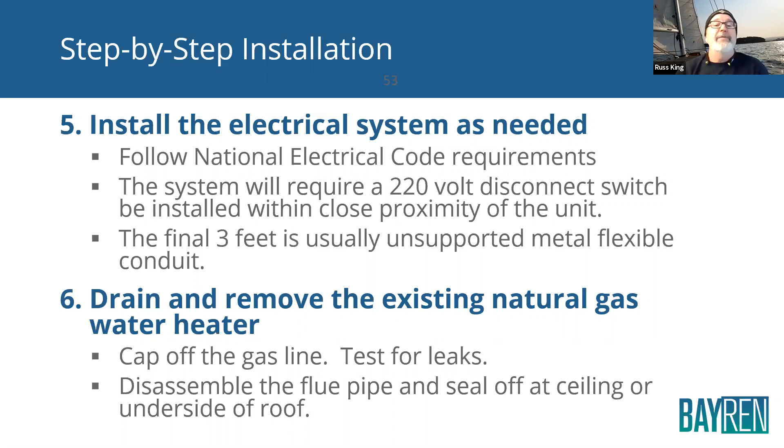Install the new heat pump water heater. Follow manufacturer's instructions, connect all water pipes, insulate to code, connect the condensate and PT overflow, completely fill the tank while bleeding off the air, observe all connection points and solder joints for leaks. If you've installed any water heaters at all, you know how to do that. Earthquake strap per code, verify that the circuit breaker is off, the disconnect switch is open, and then connect the electrical wires per manufacturer's specifications.

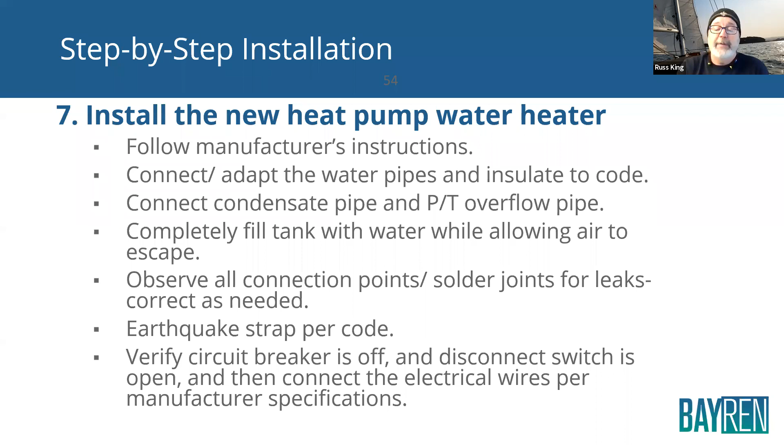Once you are ready for operation, turn the power on, close the disconnect switch, turn on the breaker, then you got to program the heat pump water heater. It's not just set it and forget it, okay? Read the manufacturer's instructions. It's not that difficult. They've gotten used to making this pretty straightforward. Put the unit in heat pump mode. As you'll see in a second, there's a lot of different modes these things come in. Put it in heat pump mode.

Most Bay Area weather is warm enough that it can run in heat pump mode throughout the year. Some of these have separate backup modes for very cold climates, like if you're up in Tahoe or in Minnesota. There's different settings, but the Bay Area is mild enough that you can just leave it in heat pump mode pretty much year round. The only time they may want a different mode is if they're going to have very high use, like a bunch of company spending the night, or teenage kids.

Then you might have to put it in hybrid mode, which will switch between heat pump and resistance electric, okay? But start off in heat pump mode, let the homeowner use it for a while. If it's not keeping up for whatever reason, then they can start playing with the settings. And obviously those settings will use a little bit more electricity if necessary, okay?

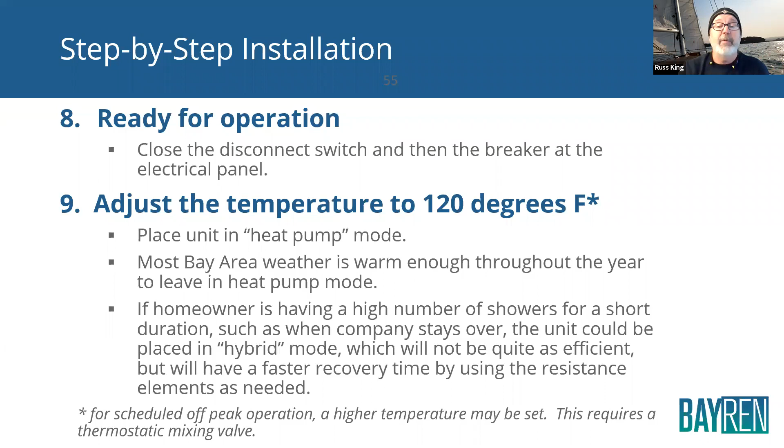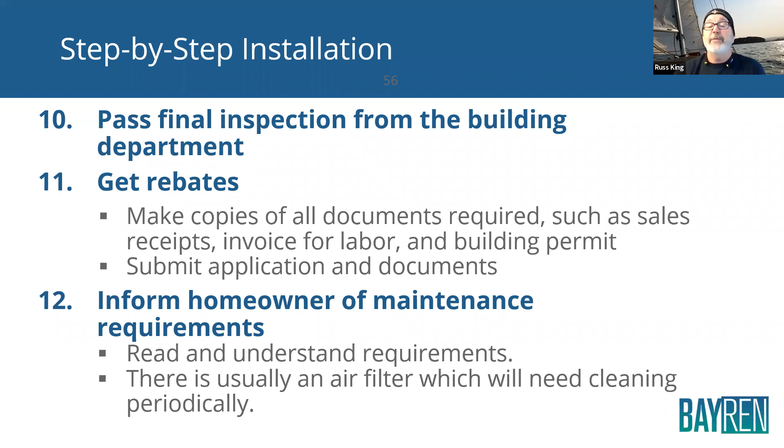Inform the homeowner of maintenance requirements, and probably not just maintenance, but operation requirements as well. Read and understand the requirements so that you can train the homeowner, so that if the homeowner calls you with questions, you can answer those questions. There's usually an air filter which needs to be cleaned periodically, so be sure they're aware of that.

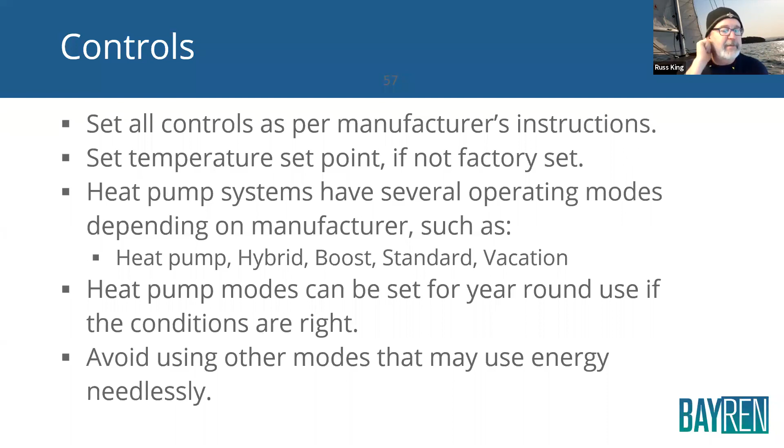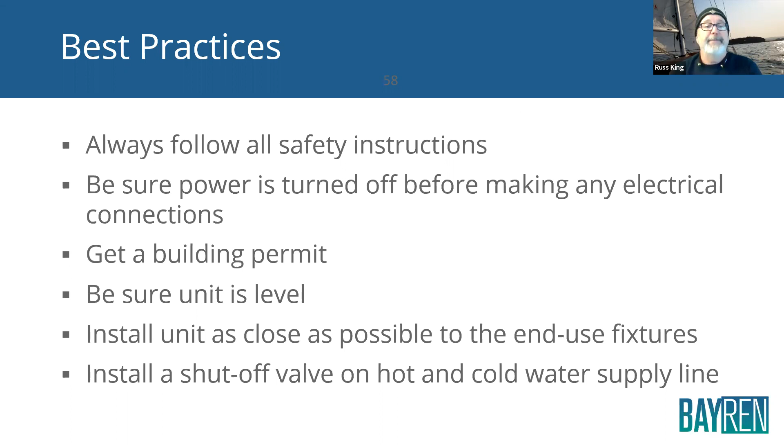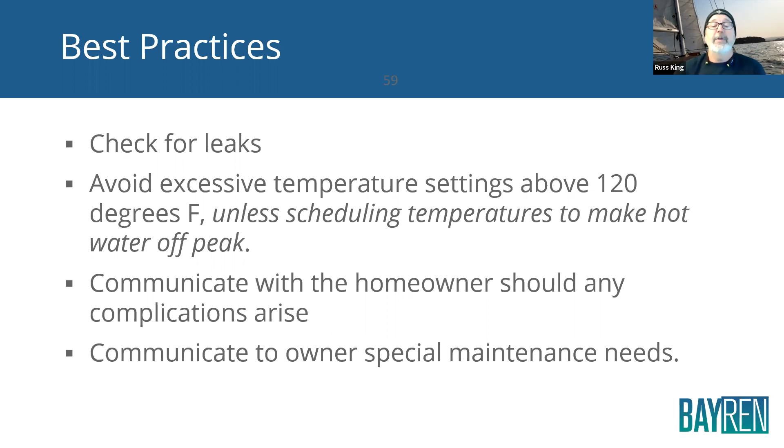Avoid excessive temperature settings above 120. Okay, unless it's that grid integration stuff I was talking about, that will actually bump up the temperature if necessary. So the water heater actually kind of acts like a battery. It's kind of cool. Communicate with the homeowner should any complications arise, and communicate to the homeowner any special maintenance needs.

All right, Jeremy, are you ready for a poll here? Yes, I am. And there we go. Sorry to rush. I want to make sure we hit the time limit here. We're quickly running out of time, and I want to give Kellen definitely some time. All right, so on your screen, you can click these buttons. Notice that you have to scroll down to see all of the questions, okay? And I'll read those to you really quick.

This is a true or false question. California Energy Code is triggered when replacing a non-functioning water heater with another one of the same size and type. Does that trigger the California Energy Code? True or false? Number 2, if a homeowner wants to add a recirculation system to their water heater, the recirculation system must be what kind? Timer temperature controlled, demand controlled, infrared control, or no controls are required.

Number 3, a homeowner can replace their gas storage water heater with a heat pump water heater that meets which of the following requirements? Base efficiency on an insulated pad with special grid integration, a NEEA Tier 3, an electric resistance water heater with solar panels, or 1 and 2. Okay. I think that's supposed to be A and B, so it's A, B, C, and then D is A and B.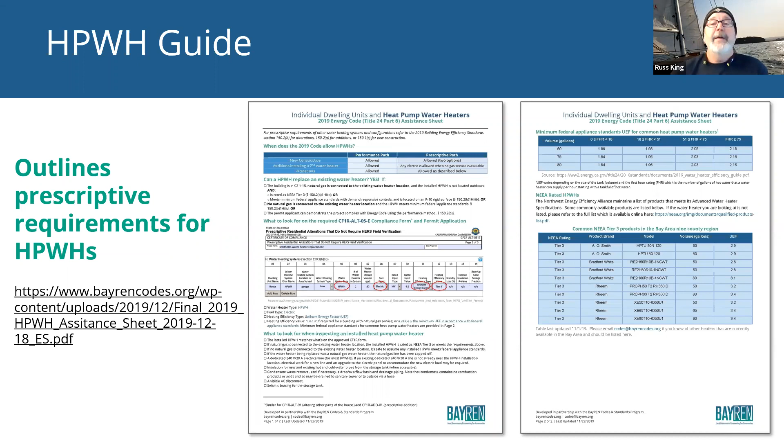Some resources for permitting compliance really quick. These are the handouts that you got. They have something called a heat pump water heater guide. That's a great tool. This is specific to heat pump water heaters and gives you a little more specific details on getting a permit and the types of water heaters that you can install, and it covers the NEEA website and stuff like that. Then this other one is called the Alterations Permit Guide for Water Heaters. This covers all types of water heaters. It asks you, what kind of water heater do you have now? What kind do you want to replace it with? And it tells you what requirements you have to go through.

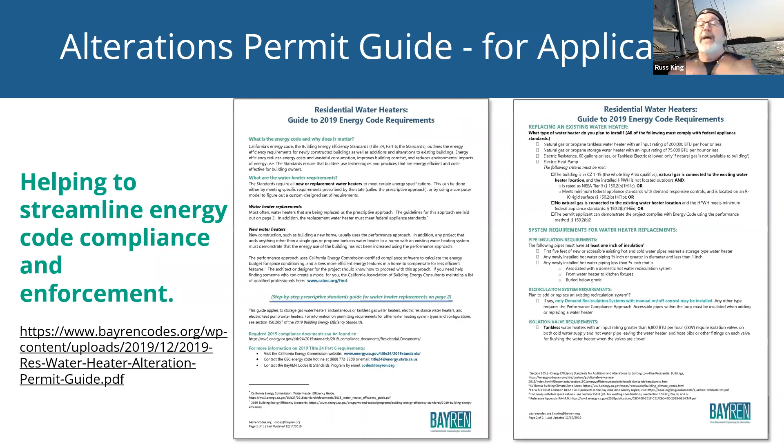And there's this very nifty online tool, the online BayREN e-permit tool, which is very similar to this permit guide, but it's an electronic version. It asks you some questions, you answer them, and it tells you what you can install and what you can't install. So that's a pretty slick tool. Building departments like to send people to it for answers. You can send homeowners to it. You can use it yourself. It's very handy and it's accessible online.

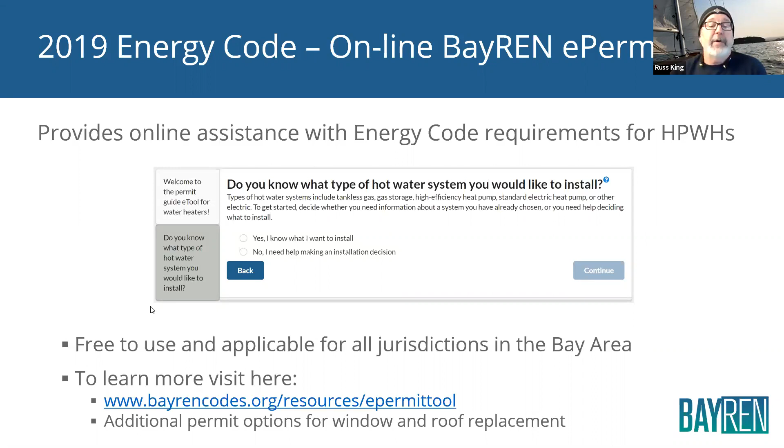And then, Kellen, I think this is back to you now. There's going to be a couple slides about the incentive program.

Can we go to the next one? A slight delay.

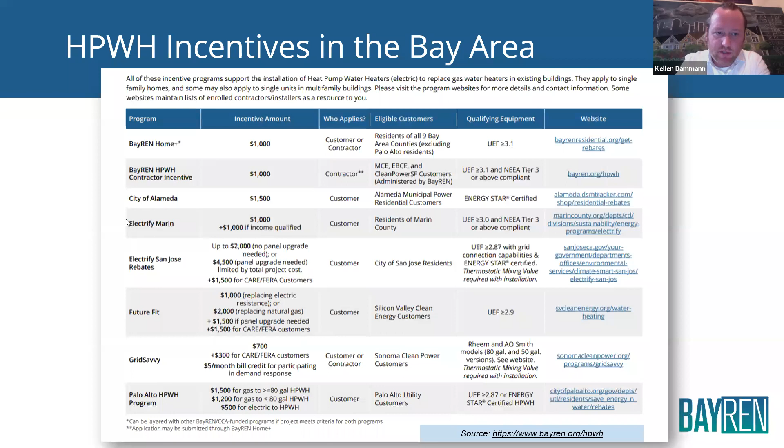Okay, so yeah, this is more information on that. So basically what's going on with this program is BayREN is partnering with MCE Clean Energy, and other what are called CCAs, community choice aggregators, are doing their own programs. I know a lot of the contractors on the call today are in Marin, so this extra $1,000 incentive is for MCE customers. But as you can see on this, and we're going to be sending it out, there are some additional rebate programs depending on where people are.

And also in Marin, the county runs a rebate program for electrification projects, including heat pump water heaters, and that's called Electrify Marin. The cool thing about this program is usually the rebate is handled by the homeowner, so it's not a lot of extra work for the contractor. You just need to make sure people are aware of it. And that's another $1,000 plus an extra $1,000 if that person's income qualified.

And that can be stacked on top of the two other rebate programs, Home Plus and the BayREN heat pump water heater contractor incentive, for $3,000, up to $4,000 for income qualified folks, for a heat pump water heater. So that's a pretty big chunk of the project. So yeah, that's definitely a good thing. And hopefully this is going to really bring up the market and demand for heat pump water heaters, at least in Marin. And all these other jurisdictions are doing great programs as well.